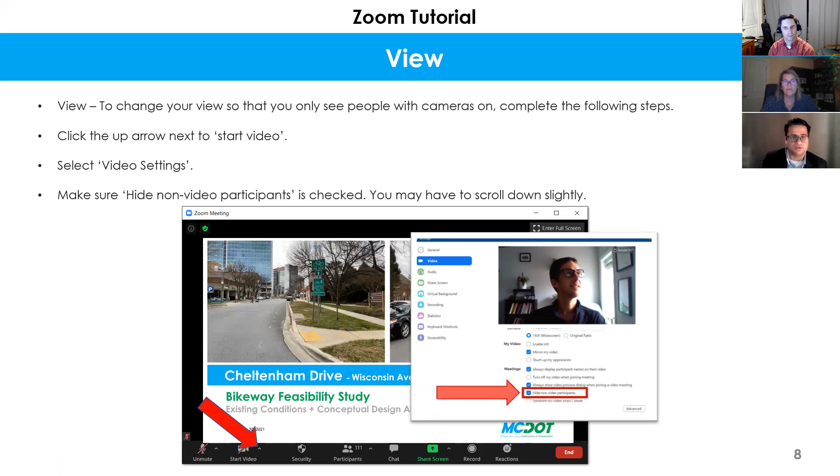At that time, we presented many of the projects that are part of this Bethesda Loop, which includes 2 that are under construction currently, along Bethesda Avenue and Woodmont. Soon to be under construction will be the Montgomery Lane Avenue segment. So Cheltenham is the northernmost portion of this Bethesda Loop, and it's an important east-west connection.

What are our project goals? First, we wanted to identify the route and bikeway types to complete the Bethesda Loop between Wisconsin Avenue and Pearl Street. We reviewed previous plans, including the Bethesda Downtown Plan adopted in 2017, the Montgomery County Bicycle Master Plan, and more recently in 2020, the Bethesda Streetscape Standards.

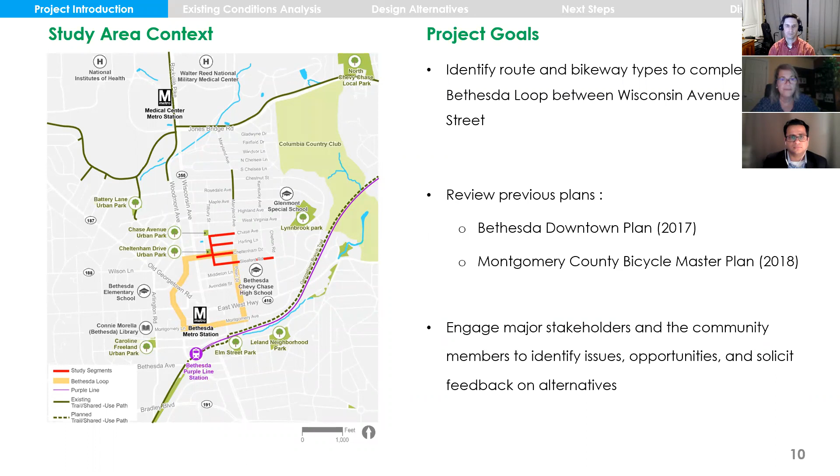As I mentioned, these are the previous plans approved back in 2017, 2018, and most recently the Bethesda Streetscape Standards adopted in 2020. The more recent plans recommend separated bike lanes on Cheltenham Drive between Wisconsin and Tilbury. That's the reason why we are performing this feasibility study.

It was something that we felt was part of a grant that we could submit, and we were awarded grant money from the state of Maryland. Again, it is a feasibility study.

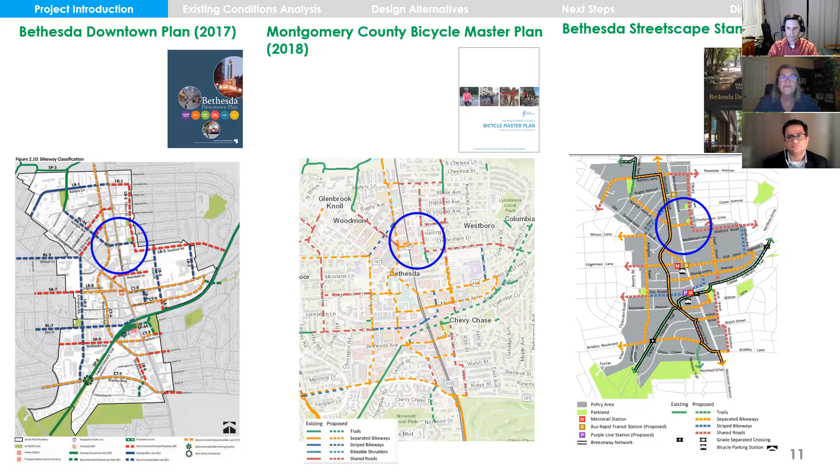So the outcome of tonight's public meeting and all of our analyses will be summarized in a report by the end of this year. The next slide again goes through the various segments.

Just quickly, Cheltenham Drive between Wisconsin and Pearl is 2-way between Wisconsin and Tilbury. Then you get to the circle, and it's 1-way westbound east of Tilbury.

There's certainly some challenges that we found with the 1-way westbound residential streets, parking and narrow cross sections, which Aditya will go into more detail.

The other streets, Tilbury to Sleaford to Chase Avenue, that's 1-way northbound between Sleaford and Cheltenham, and then 2-way north of Cheltenham Drive.

Chase Avenue is 1-way eastbound between Tilbury and Pearl, and Harling Lane between Tilbury and Pearl is 1-way eastbound. Finally, Sleaford from Tilbury to Pearl is currently two-way.

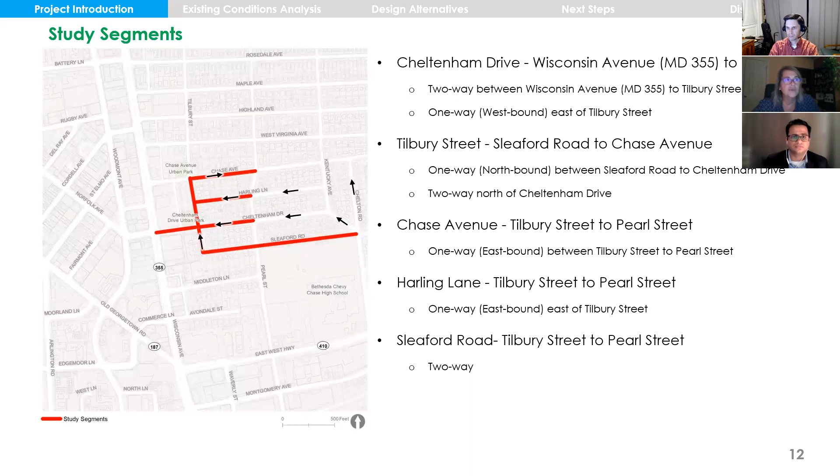So here's our planning process. We launched the project in November of 2020. We've been performing right-of-way topographic surveys in early 2021 as part of our existing conditions analyses.

We've been looking at network alternatives and bike facility type alternatives. Now we're here as part of our public and stakeholder feedback. Public participation is very important in developing these alternatives. After this, we'll synthesize all the comments.

We will also have a survey for those interested in a deeper dive into specific questions and issues. Once we compile all those comments, that'll be part of our preferred network alternatives and preferred bike facility type alternative. With those results, we'll start developing our concept design plans and produce a final report with a final presentation. Hopefully this will all be wrapped up.

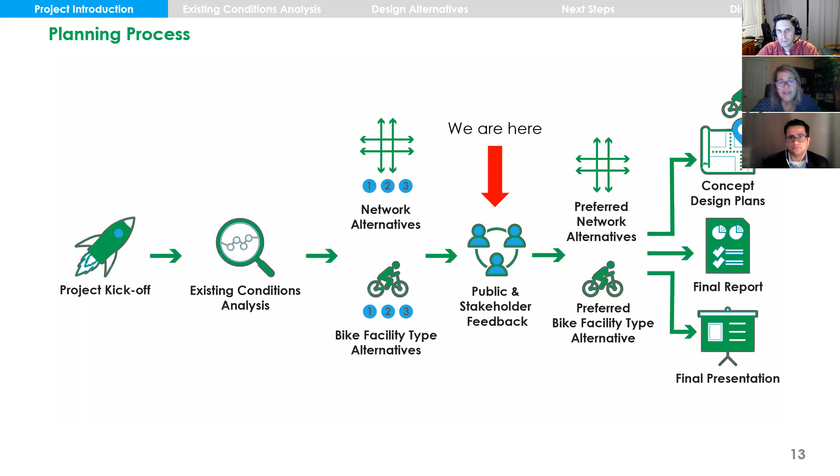On the next slide, we'll show the schedule that we hope to wrap everything up by December of this year. As you can see, we're here where we have a red arrow in September, so we have the next 3 months to wrap everything up.

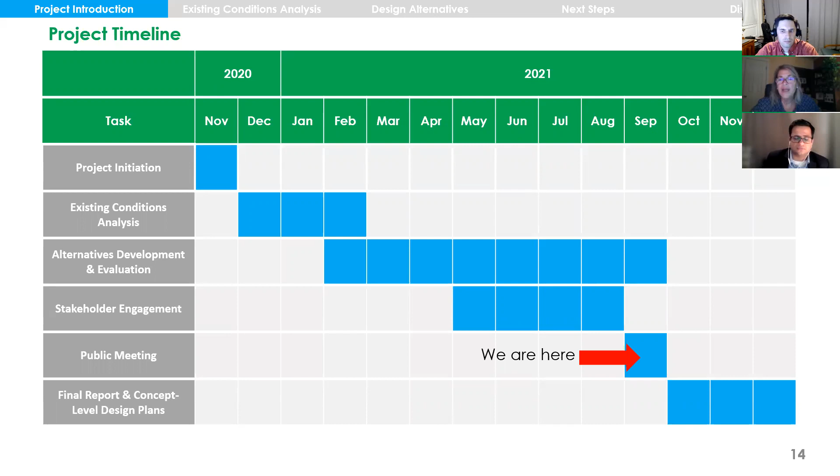And with that, I think the part you've all been waiting for is Aditya's presentation. So with that - yeah, thanks Pat. I'm going to start with a little bit of existing conditions analysis and then go into design alternatives.

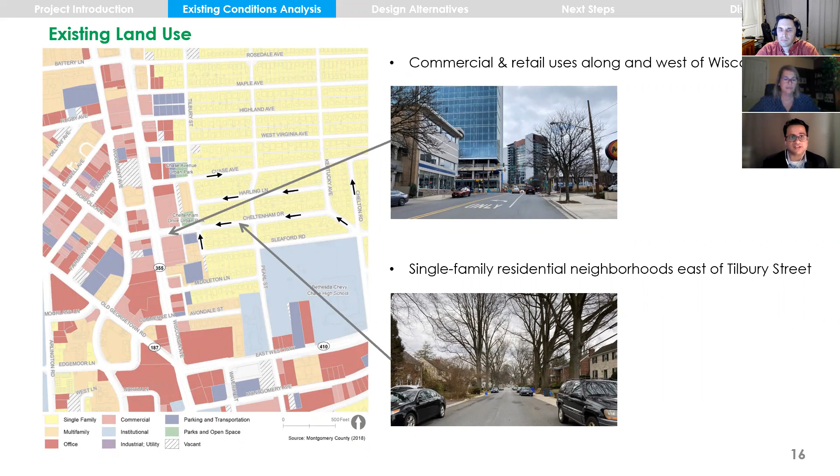So we started looking at this area. We looked at land use and quickly identified two context zones. We have the commercial area and the block between Wisconsin Avenue and Tilbury has some commercial land uses, a park, some residential with a parking garage. But beyond the circle at Tilbury Street, the context changes into single family detached residential neighborhood, and the streetscape and street widths also change pretty dramatically. So the land use and transportation context really changes at Tilbury Street, and we're aware of those two context zones.

In terms of existing pedestrian facilities, a lot of the streets have sidewalk on one side. Again, these are kind of narrow residential streets. On Cheltenham Drive between Tilbury and Wisconsin, we have sidewalks on both sides.

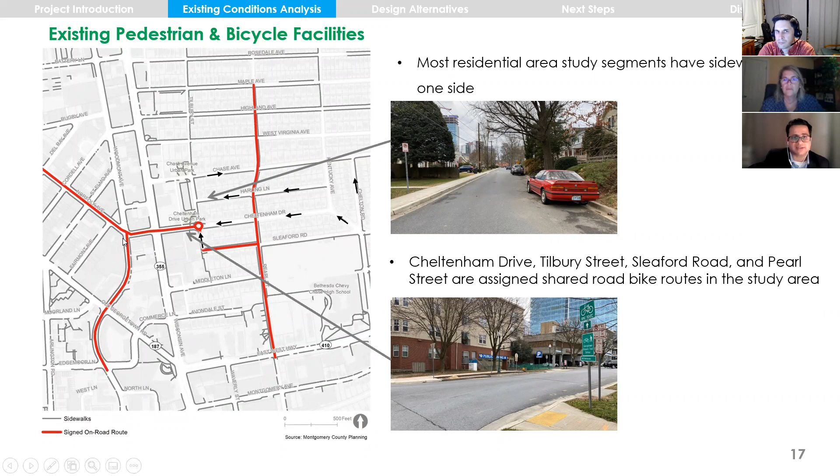In terms of bike facilities, there are certain assigned bike routes. Pearl Street currently has sharrow markings and bike route signs, same with Sleaford. On Tilbury, between Cheltenham and Sleaford, that's the current assigned bike route, and it has signs that indicate people on bikes should use the sidewalk, which is already a little narrow. We have more assigned bike route signs leading people to Woodmont Avenue, and there's a two-way cycle track that's going to be under construction soon on Woodmont Avenue.

As part of the bicycle master plan, the county has done a bicycle level of traffic stress analysis, which indicates which streets within the whole county are less comfortable or most comfortable for people on bikes. In simple terms, think about kids going to school, seniors, or adults who may not be comfortable riding close to vehicular traffic. They're interested in riding a bicycle but are concerned with the existing facilities. So it's trying to map that qualitative sense of which bike facilities are most comfortable and least stressful, or more stressful and less comfortable.

In terms of the study area, Wisconsin Avenue is shown as red, meaning it's LTS 4 — most stressful, least comfortable for people on bikes. The Cheltenham Drive block between Wisconsin and Tilbury is somewhat comfortable, somewhat stressful. So when we think about people who may not be used to biking regularly, they may not feel comfortable on the street, but people who bike regularly and are more confident riding with traffic may feel comfortable. It's kind of in that middle zone.

Once we go into the residential neighborhoods, these are narrow one-way residential streets with lower traffic speeds. A lot of these streets already have traffic calming treatments, so they're categorized as comfortable, least stressful streets. But one caveat: because these are a lot of one-way streets, one aspect of our project is to identify what that eastbound bike route beyond Tilbury is. Given the one-way nature, that's the critical piece, because even if these residential streets are narrow with low vehicular speeds and traffic calming, going against the vehicular traffic flow may be stressful for people on bikes.

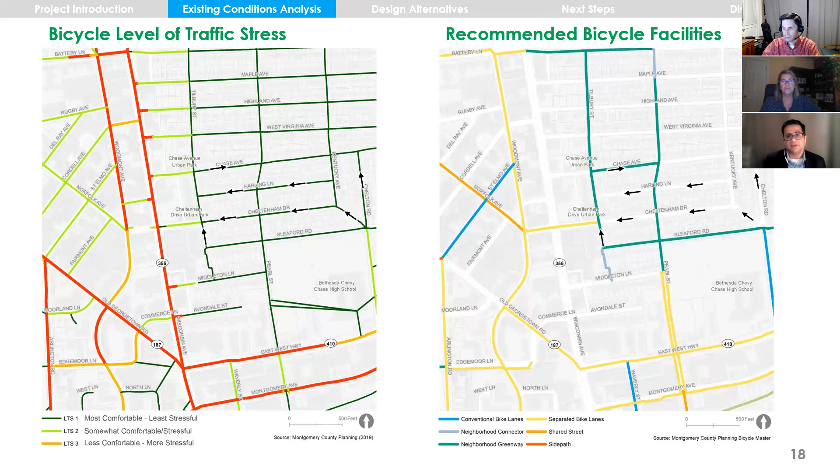In terms of the countywide bicycle master plan, there are recommended facilities in this area. As mentioned earlier, these yellow lines indicate separated bike lanes, meaning some sort of vertical separation, whether a buffer with flex posts, a curbed median, or a landscape median between the bike lane and vehicular traffic. Once we hit Tilbury, there are recommendations for a neighborhood greenway, which indicates a road shared between bikes and vehicles — not necessarily dedicated bike lanes, but streets that are narrow with low vehicular speeds and traffic calming where bikes can share with traffic. So Tilbury Street, Chase Avenue, Sleaford Road, and Pearl Street in the study area have been identified as that neighborhood greenway in the countywide master plan.

There are some additional off-peak on-street parking spaces in front of Cheltenham Drive Urban Park. On the residential streets, most of the residential area street segments have on-street parking on one side. Cheltenham Drive is actually the only street beyond Tilbury Street where parking is on both sides because it's a little wider than Chase, Harling, or Sleaford.

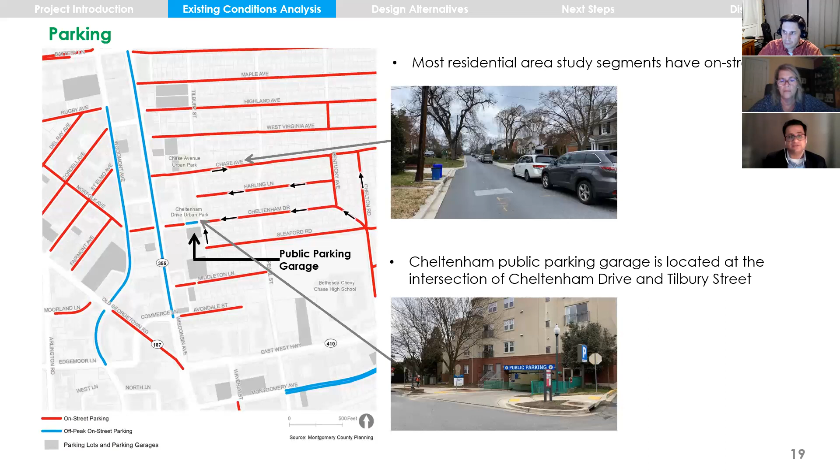Another important thing to note is Cheltenham Public Parking Garage is on the block, and it's publicly available parking, with I think 300 plus parking spaces in the study area as well.

So it is the data we have, but it may not be as complete as data you all may be more familiar with. But this is the data we have, and we wanted to present it. On the north side of Cheltenham Drive, near Midas, there are 2 spaces with a 1-hour restriction, and again in the evening it seems like it was fully occupied. These are averages over 2 days.

On the east side, on Wisconsin Avenue, there is no stopping in the AM and PM peak hour. Otherwise, there are 4 parking spaces in this area on the block, just north of Middleton Lane to Cheltenham Drive, and again in the evening it was fully occupied.

Then, as I mentioned, the Cheltenham Public Garage has 345 total spaces. There isn't any restriction, though some spaces may be short-term. But based on these numbers, it seems like there's a lot more capacity in that parking garage.

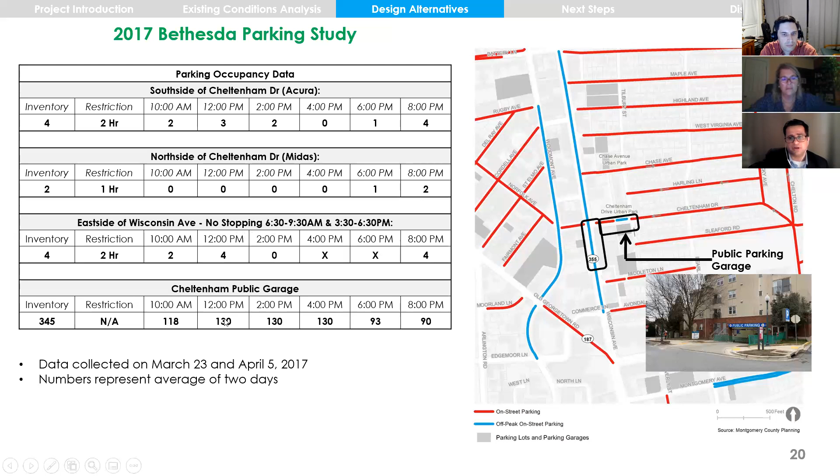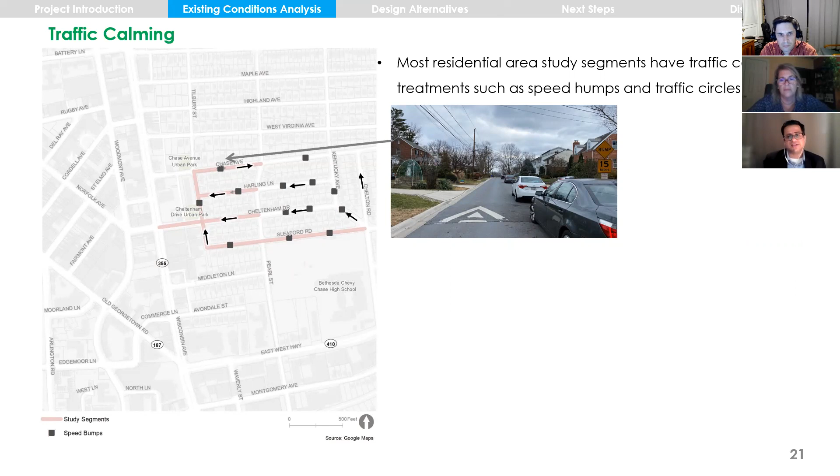On the residential streets, there are already existing traffic calming treatments, such as speed humps. The narrow nature of the street cross section with street trees and on-street parking also helps with traffic calming.

The next few slides I want to introduce these study segments in a bit more detail, and talk about some of the existing dimensions and the lane configurations.

The total width is 48 feet curb face to curb face, and the total approximate right-of-way is 80 feet. We have a nice 5-foot green panel with trees and grass, and then 10-foot wide sidewalks on both sides. Beyond the alley to Tilbury Street, the street actually narrows a bit.

The right-of-way is still 80 feet, but the curb to curb varies, from the narrowest point at the garage driveway of about 27 feet, up to 37 feet closer to the circle. It's bi-directional traffic, and there are some parking spaces for off-peak hours on the north side of the street.

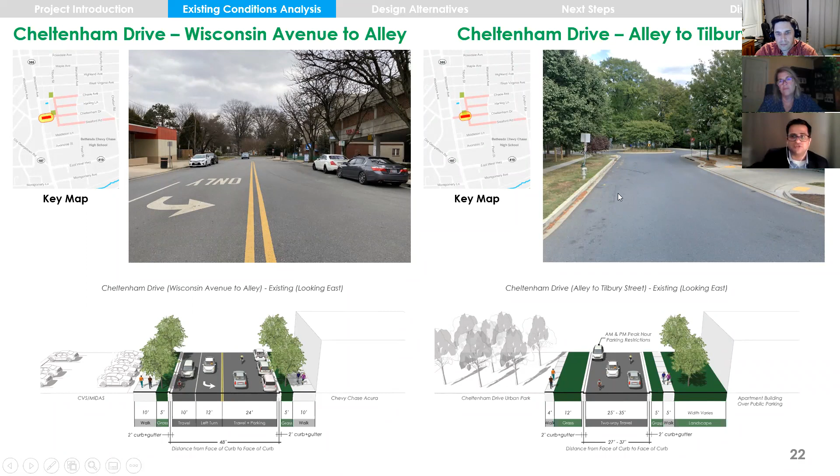As we go into the residential part, a lot of these cross sections look similar to each other. Cheltenham Drive is actually a bit wider, at 27 feet curb face to curb face. It is one-way westbound, but has on-street spaces on both sides. We recognize that a lot of houses on this block do not have driveways and rely on these on-street spaces.

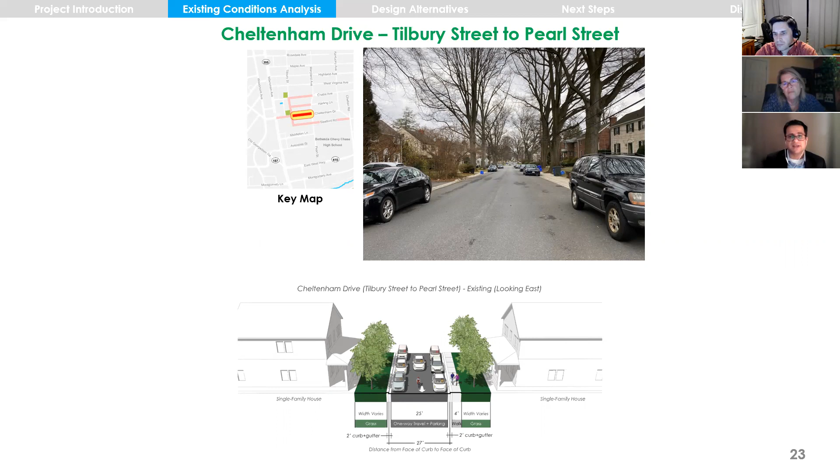Then Chase Avenue between Tilbury and Pearl. Again, these are narrow residential streets with parking on one side, and there's a 4-foot sidewalk behind the curb on one side. These are 19 feet curb face to curb face, pretty narrow, with 1 lane of travel and on-street parking.

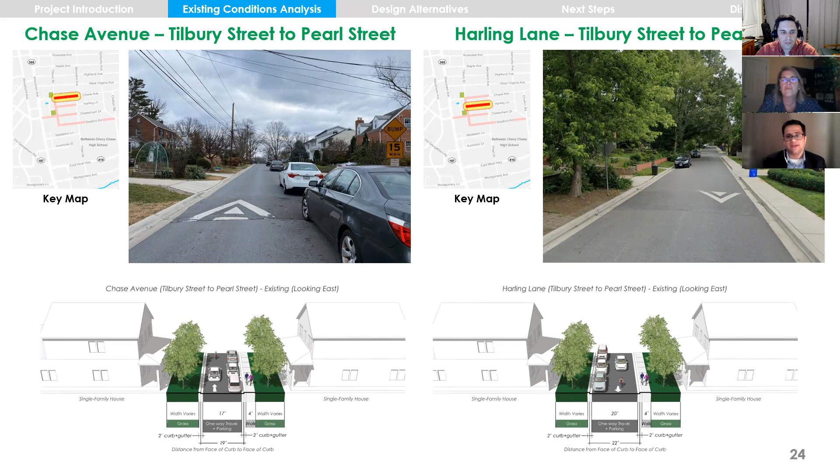Harling Lane has a similar story. Chase Avenue is actually the only street in the study area that's one-way eastbound. Harling Lane is one-way westbound, as is Cheltenham Drive. The dimensions are about 22 feet curb face to curb face for Harling Lane, with 1 lane of travel and on-street parking.

Sleaford Road from Tilbury to Pearl is again a narrow street, 22 feet wide. This is an interesting condition: this segment is 2-way, but Tilbury Street from Sleaford to Cheltenham Drive is 1-way, and you cannot enter from the circle. So only folks on this block are able to make a right or left turn and travel east on this street. Bicycle traffic is bi-directional here, and this is part of the assigned bike route currently.

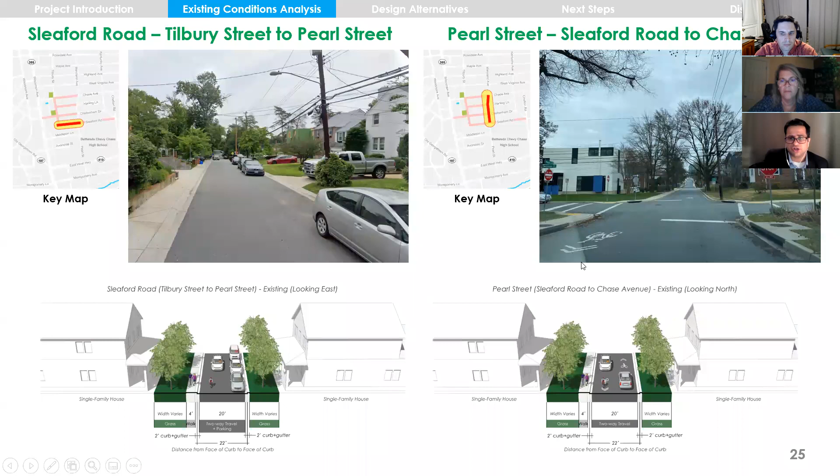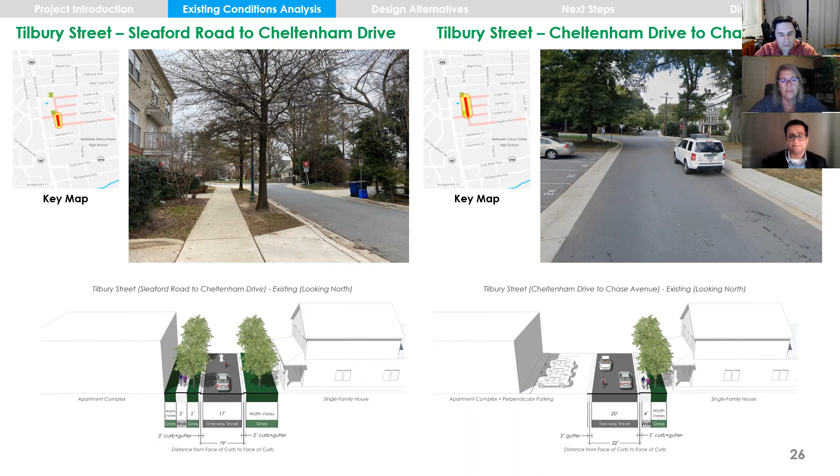Pearl Street is a wider street, 2-way, with share markings indicating bicyclists can share the lane, and it's part of the assigned bike route. Tilbury Street from Sleaford to Cheltenham is 1-way, 19 feet, but just 1 lane of travel, with parking restrictions so there's no on-street parking on this block. North of Cheltenham, it is 22 feet and 2-way, with no on-street parking on that block.

This diagram summarizes the issues and opportunities from existing conditions. We recognize two distinct land use context zones: the commercial block and the residential neighborhood. The traffic circle at Cheltenham Drive marks that change. Many study segments are 1-way narrow residential streets. Cheltenham Drive and Norfolk Avenue have similar cross sections, and the eventual goal is to continue the cross section for Cheltenham across Wisconsin along Norfolk to connect to Woodmont Avenue with 2-way separated bike lanes.

Can you go back for a second? I want to make clear that the dashed line extending down Woodmont from Norfolk will connect to the Capital Crescent Trail. That's right. There had been some confusion about the Bethesda Loop being a circle that didn't seem to connect down to the Capital Crescent Trail, but it does.

The construction activity has been on pause for the last month because of the streetery, but we anticipate beginning the rest of the Woodmont cycle track construction in November.

Thank you, Pat, for that. I think the Bethesda Loop was more like a loop of facilities in downtown Bethesda, but some of the facilities I can see here on Pearl Street, the assigned bike route, continue to Jones Bridge Road. So these facilities expand and connect to other facilities, but the loop was more about the downtown Bethesda facilities.

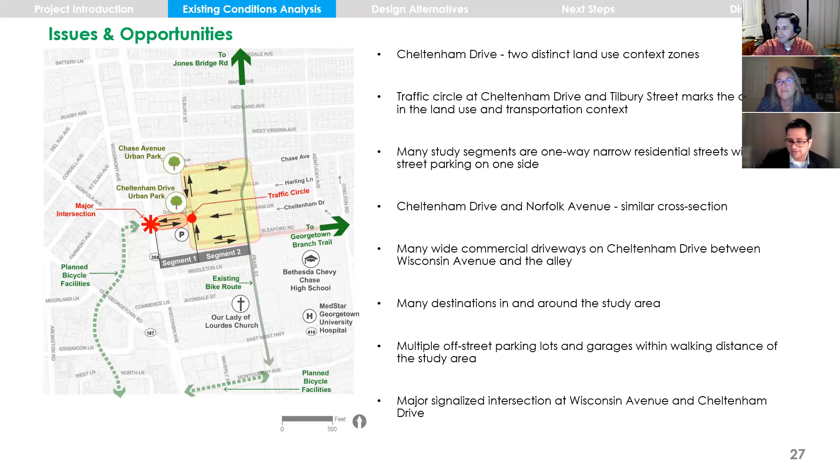For the next section, I'm going to transition into design alternatives. There are two aspects to our alternatives. One is the network route alternatives that connect Woodmont Avenue to Pearl Street—how do we find that alignment, especially for eastbound bicycle travel beyond Tilbury? The second aspect is the bikeway facility type alternatives, especially for Cheltenham Drive between Wisconsin Avenue and Tilbury Street.

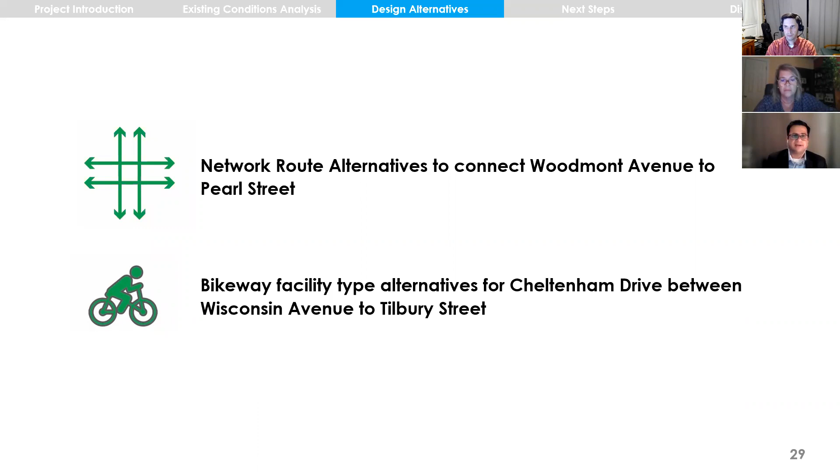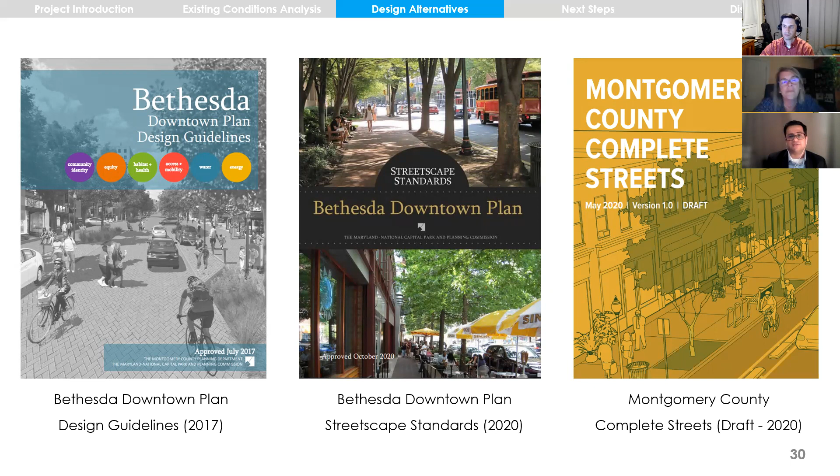When we started developing these alternatives, we referred to the latest and greatest standards: the Bethesda Downtown Plan developed in 2017, the Streetscape Standards from 2020, and the draft Complete Streets plan for the county. The dimensions in some of these alternatives are a direct result of the dimensions recommended in these plans.

In terms of the network alignment alternatives, we have three options. Option A, or alternative A, is Cheltenham Drive, then south on Tilbury Street, then Sleaford to connect to Pearl Street. Sleaford Road would eventually continue as a neighborhood bike route to Georgetown Branch Trail when that connection opens up, which is currently closed for the Purple Line construction. But this is the current assigned bike route. The challenge is that little one block of Tilbury Street is one-way vehicular traffic, so the question is how do we get people on bikes to travel southbound?

One alternative we've come up with is a contraflow bike lane, meaning there's a bike lane on one side of the street, and in the other direction people share it with vehicular traffic, which is one-way northbound. Alternative B is a straight shot on Cheltenham Drive. This option has heavy parking impacts on that block because Cheltenham Drive is one-way westbound, so the challenge is: if this is the assigned bike route, how are people going to go east?

But we do recognize that parking is critical for that block, but we wanted to test all these alternatives for their pros and cons.

And then alternative C is kind of a loop. You connect Cheltenham Drive, then use Tilbury Street, and follow the vehicular directions. Chase Avenue is one way eastbound, so that will be the assigned route. And then Sleaford is the natural westbound traffic, and Pearl Street remains this north-south bike route.

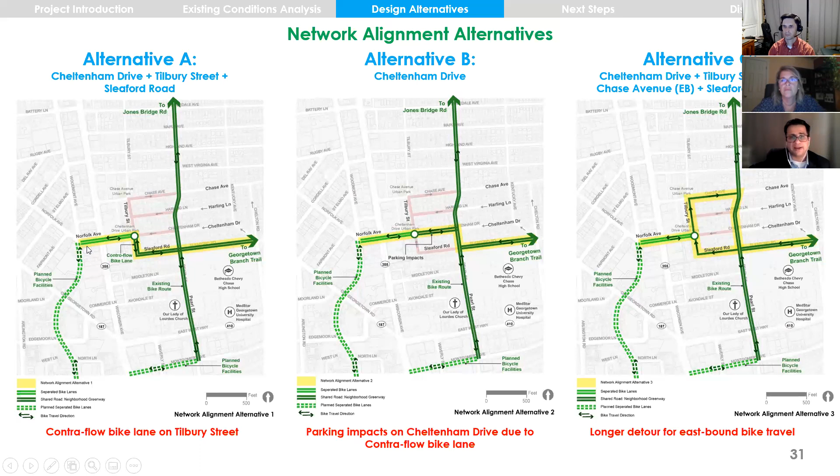For the alternatives, if you notice on all the network alignment alternatives, the Cheltenham Drive segment between Wisconsin and Tilbury is common for all these networks. That's simply because this is one of the locations where we are able to cross Wisconsin Avenue at a signal and then connect to Woodmont Avenue separated bike lanes. So this Norfolk Cheltenham connection is common on all these network alignments.

So we wanted to look at Cheltenham Drive's bikeway facility options. We have 5 options for this one block segment. Option 1 is conventional bike lanes.

Now, again, this is not recommended in the countywide bicycle master plan. So we would be deviating from what's already adopted, and we would need very strong reasoning to deviate from an adopted countywide bicycle master plan. But again, we wanted to test it and see how it matches with some of the other alternatives in terms of evaluation measures.

So this option basically restripes the existing roadway with 5-foot bike lanes on either side. The bike lane going eastbound would be sandwiched between a 10-foot vehicular travel lane and 8-foot parking, so this would be kind of tight. And again, we would be deviating from the countywide master plan. But this does keep all the existing on-street spaces, so there are no parking impacts in this option.

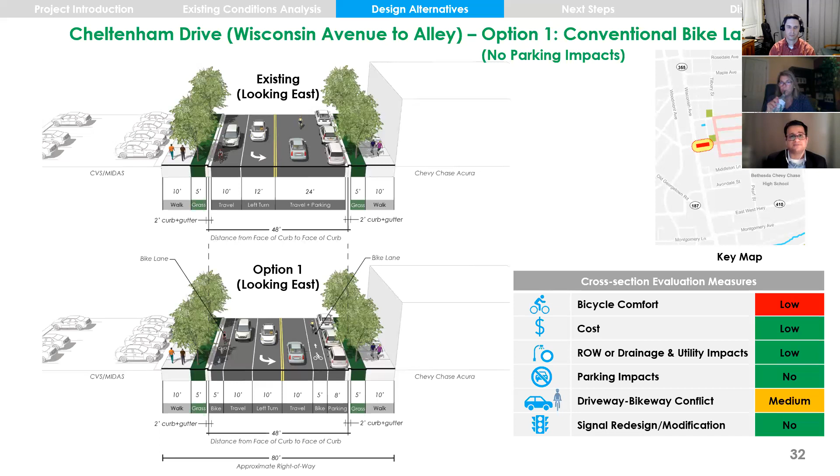So this is what it looks like today, looking east. And this is a rendering depiction of that option. Basically, we would have a striped bike lane with some green conflict paint at driveways and intersections. But this is basically a 5-foot bike lane, and you're sandwiched as a person on a bike between a car and on-street parking.

With these facilities, the dooring issue is a concern where people getting in and out of parked cars. Dooring has been a big issue with bicycle crashes. The other thing is, given the driveway widths and the number of driveways on this block, some of the on-street spaces come really close to the driveways, and there's concern with sight distance. If you look at this image and imagine riding a bike in this bike lane, sometimes it'll be hard to see a car coming out of the driveway, or for a person in the car coming out of the driveway to see you as a person on a bike.

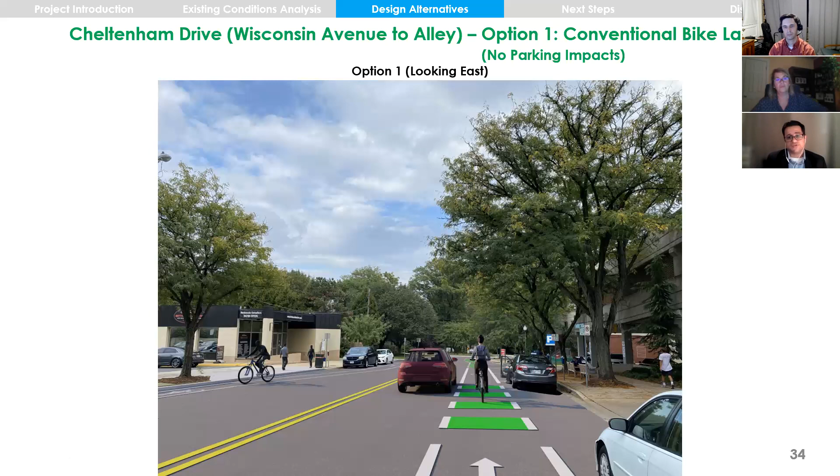So again, those are some of the safety issues with this option. But again, this option keeps on-street spaces and is low cost to implement.

Option 2 is one-way separated bike lanes. This would technically be following the countywide master plan. It is a separated bike lane. This would be impacting those 4 on-street spaces on the south side. This would keep the 3 lanes, 1 lane in each direction plus a left turn lane, and use the parking space width to create that buffer between a bike lane and the car travel lane.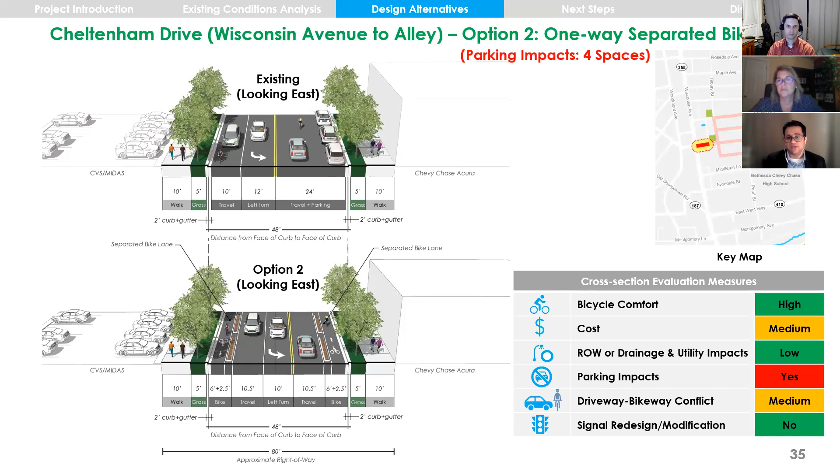With this, the bicycle comfort is high because we are separated from vehicular traffic. The cost is medium because there will be some construction costs associated with building those medians, but we're not moving curbs or drainage, so that is low. There are 4 parking spaces impacted. The driveway and bikeway conflict is medium because you're on the side of the vehicular traffic for a person coming in and out of the driveway. And there are no signal redesign modifications expected with this option.

And again, a rendering depiction of this option. This is the existing. With this, you'll have a median that could be a brick stamped concrete median or a precast median, and then that conflict marking at driveways. This provides better sight distance and view angles for people on bikes to look at the driveways, and vice versa for people in the driveways coming in and out.

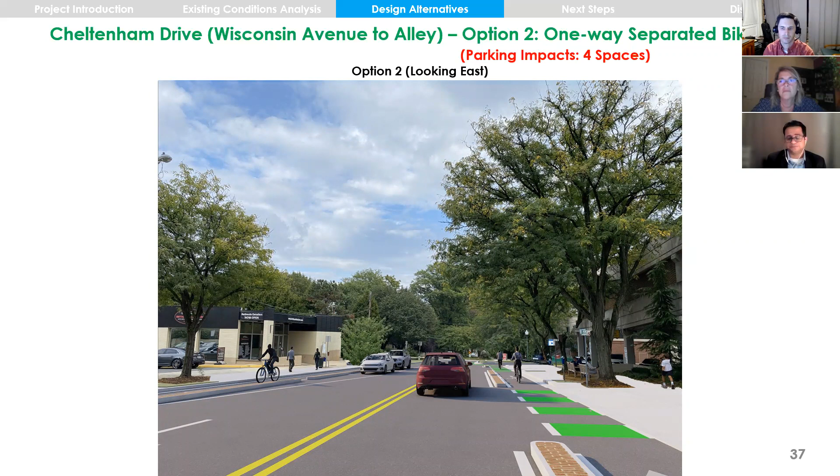Option 3 is 2-way separated bike lanes on the north side. This is an option where we are testing if we can fit everything we want on this narrow 48 feet curb face to curb face. We keep parking in this option, we keep the 3 lanes, and we have a 2-way separated bike lane. But the drawback is that all the widths are minimum or lower than minimum recommended in the standard. So an 8-foot 2-way separated bike lane with a 2-foot buffer that includes the gutter pan is substandard for a 2-way separated bike lane. So that is a concern here.

Same thing here with 17.5 feet. You're going to have a 10-foot or 10.5-foot travel lane and 7-foot on-street parking, including the gutter pan. So these are minimum or lower than minimum dimensions, and it's going to be tight.

So the bicycle comfort is medium because it's tight. The cost, with the separators between the bike lane and the travel lane, is medium. But we're not trying to move the curbs, and we're not expecting to change the drainage or utilities. The parking impacts are none here because we're trying to maintain that. And we're saying there is high driveway and bikeway conflict because it's a two-way separated lane on the north side. People coming in and out of that CVS driveway or that alley generally don't expect two-way bicycle traffic, and they don't look to the right coming out of the driveway to see a bicyclist coming from the other direction. So that's a safety concern.

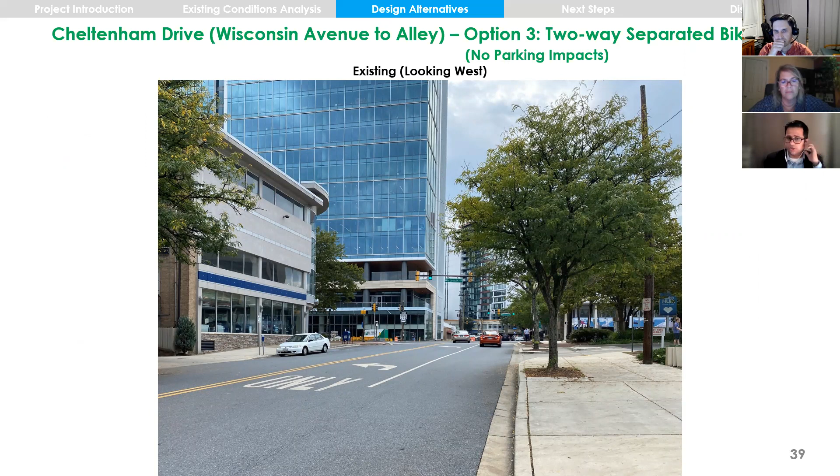With this, we might have to redesign the signal. So again, it's a yes. This is kind of a rendering depiction. We are on the other side of the street now, looking towards Wisconsin Avenue. This is kind of what it would look like. It's kind of tight, but we'll be able to get that separation. We'll have to use that gutter pan width. So it's not ideal, but we're trying to test if we can fit everything in here.

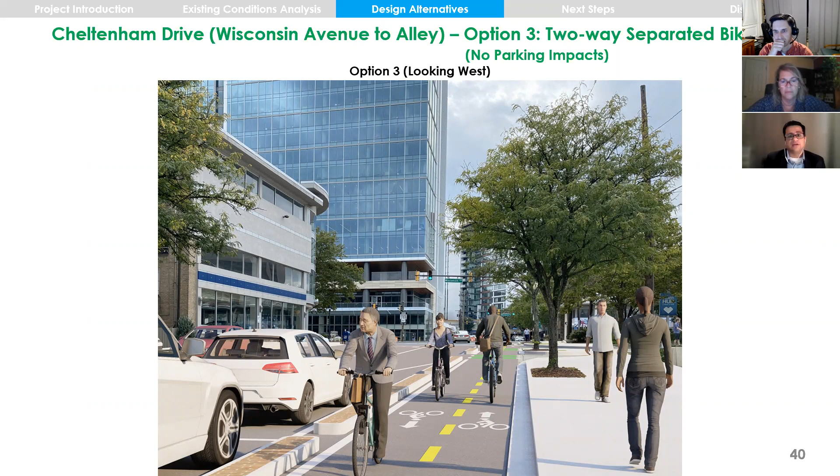Option 4 is a similar option, two-way separated bike lanes on the north side, but this tests if we take parking away and use that space to do a nicer landscape median, or a wider median between the two-way separated bike lanes and the travel lane. The dimensions here are much better in terms of the standards. So we have a 12-foot two-way separated bike lane with a 5-foot buffer, then 10.5-foot outside travel lanes, and a 10-foot left turn lane.

So there's high bicycle comfort. The cost is medium again. Right-of-way and drainage utilities are low because we're maintaining the original curbs and the drainage. The parking impacts are there with those 4 spaces. Again, because it's a two-way bike facility, we're saying high driveway and bikeway conflict. And we might have to redesign the signal.

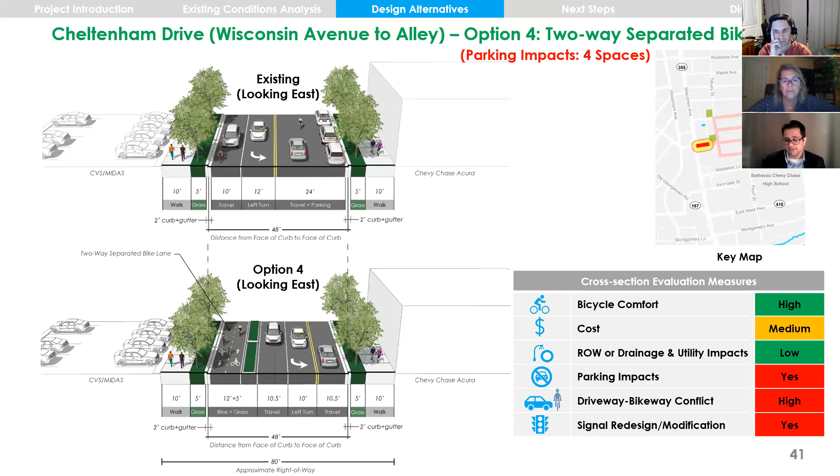Again, this is a rendering of what it would look like - much wider two-way separated bike lanes. With the wider widths for the medians, we might be able to do some landscaping. But there are some underground utilities, so if this is the option we proceed with, when we start testing and developing initial designs, we might have to remove the landscaping and have stamped brick or a different kind of treatment. But it'll have a wider separation between vehicular and bicycle traffic.

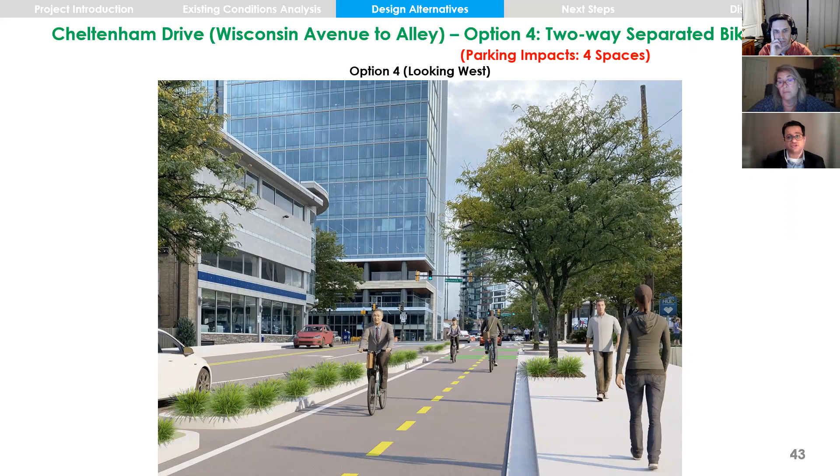Option 5, the last option for this block, is basically a long-term option - a two-way raised separated bike lane. The curbs would move, and we'd design a two-way separated bike lane at sidewalk level, with a tree panel separating the curb and the bike lane. Very high bicycle comfort quality, but very high cost since we're reconstructing the street at this point. We'll most likely have to move drainage and utilities to build this. But with just one separation between the curb and the ped and bike facilities, we'll be able to keep the parking. In all the earlier options, because we were maintaining existing curbs and adding an extra buffer between the bike lane and travel lane, we no longer have to do that here since the ped-bike zone is one zone with one separation via the tree panel.

The driveway-bikeway conflict we're calling low, because with this option we might be able to consolidate some driveways or redesign them with better signage or turning radii, maybe raised driveways that help with safety concerns seen in other options. But we'll have to redesign the signal. So this is a high-cost, long-term option we're not sure is feasible in the short to medium term.

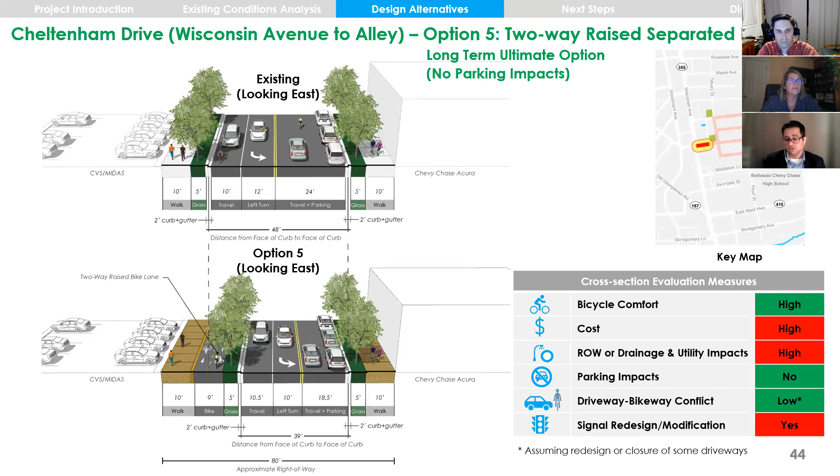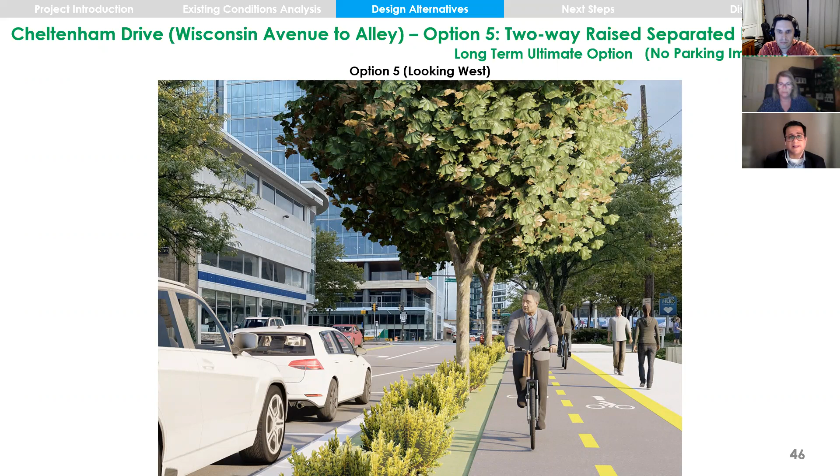This slide summarizes all these options. Option 1 is just striped conventional bike lanes - low bicycle comfort, but low cost, low drainage impacts, and keeps parking. Options 2 to 5 are all separated bike lanes, so they technically comply with the countywide bicycle master plan. Option 2 is one-way separated bike lanes with parking impacts. Option 3 is two-way separated, trying to fit everything in, but it's substandard in dimensions, which is a concern. Option 4 is also two-way separated, wider, but impacts 4 parking spaces. Option 5 is the long-term option with high costs.

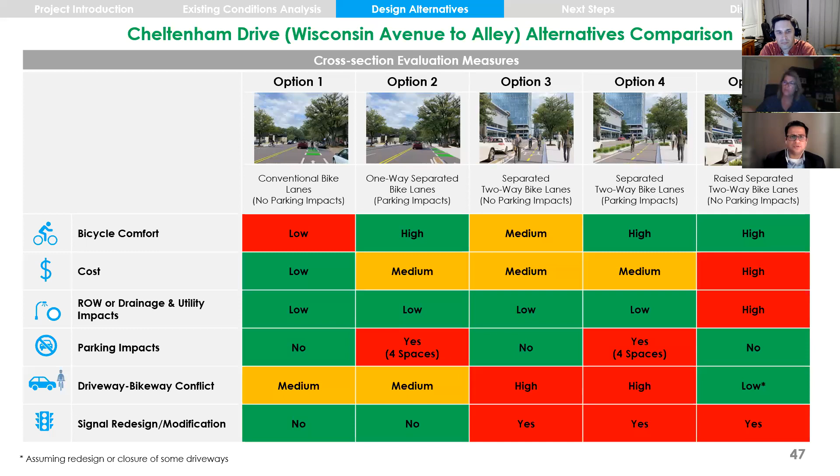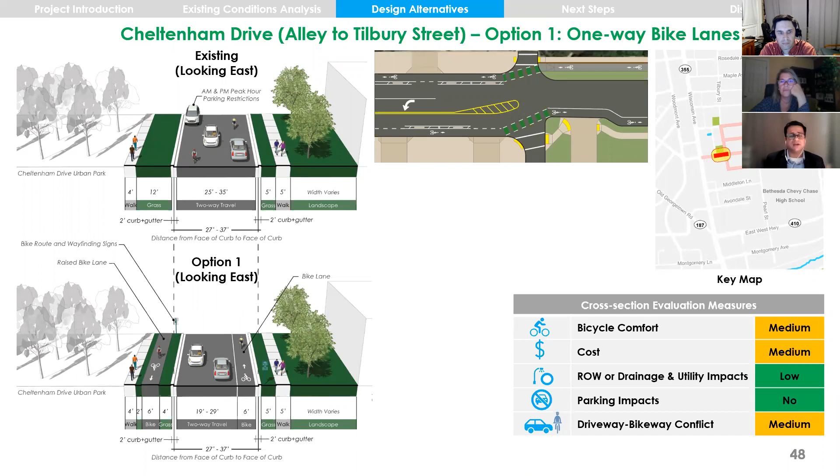Whatever option we end up with for the block between the alley and Wisconsin Avenue, if it's the one-way option - whether option 1 or option 2 - we'll transition that beyond the alley to Tilbury to keep bike lanes on either side of the street. In this location, we might use the landscape buffer in front of the park to at least keep bike lanes in one direction. Option 2 for this, if we go with the two-way options, means continuing the two-way separated bike lanes on the north side of the street, eating more into that landscape buffer in front of the park and replanting some trees there.

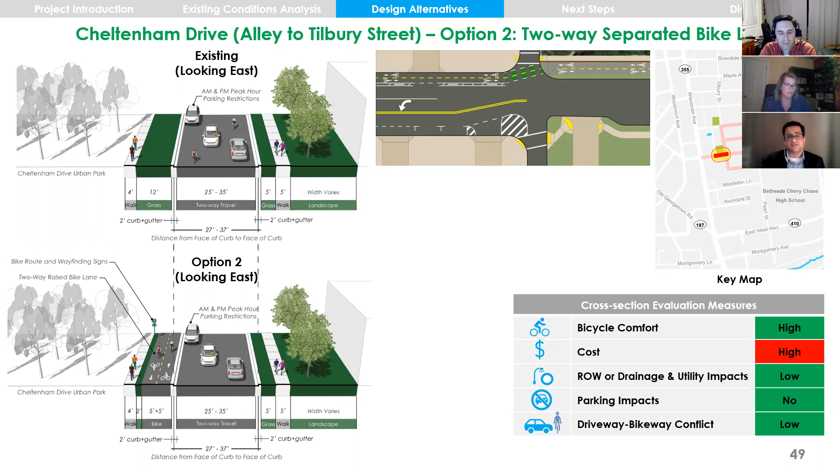Next I'm going to transition back to the network alignment. We've been talking about this one block between Wisconsin Avenue and Tilbury, which is really the most complicated block in terms of the permutations, combinations, pros and cons of all these options. But the other question we're trying to answer is what the assigned bike route is beyond Tilbury Street. If you remember those 3 network alternatives, alternative A is Tilbury and Sleaford.

Here we have slightly different evaluation measures for these network alignments - bicycle route directness, so how directly can you go from, say, Tilbury to Pearl Street. In this case we're saying medium compared to some other options I'll share. The number of intersections to navigate are 2 - basically the circle at Tilbury, and then Sleaford and Tilbury.

And then there is a little bit of contraflow travel involved here because Tilbury Street is one way for vehicular traffic northbound. So if this is the assigned bike route for two-way bicycle traffic, you'll have to travel against the vehicular traffic for this one block.

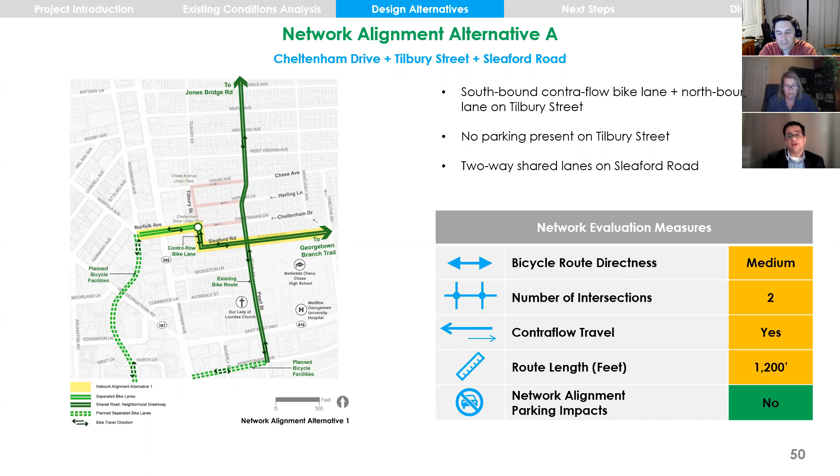And then basically we're counting the route length, which kind of matches the route directness in some ways. And then what are the parking impacts on the alignment? So in this one, we are not impacting any parking.

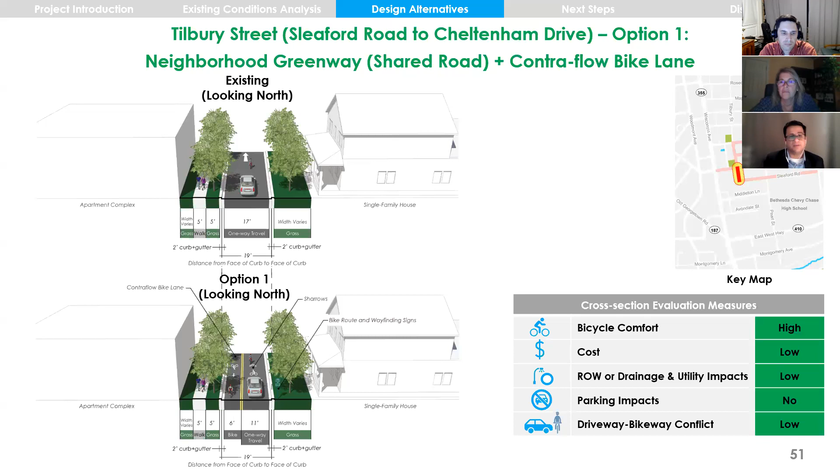And in terms of that contraflow bike lane on Tilbury, this is what it would look like. If you remember the existing cross section, we have about 17 feet from just the asphalt, so the gutter pan to gutter pan, or 19 feet from curb face to curb face. We can repurpose that space for one 11-foot northbound travel lane, and then one 6-foot southbound contraflow bike lane. So the southbound bicyclists would be able to use their own bike lane and not have to share the 5-foot sidewalk that's there today. And for the northbound, because it's a residential street, it's kind of a neighborhood greenway treatment where people on bikes would share it with vehicular traffic.

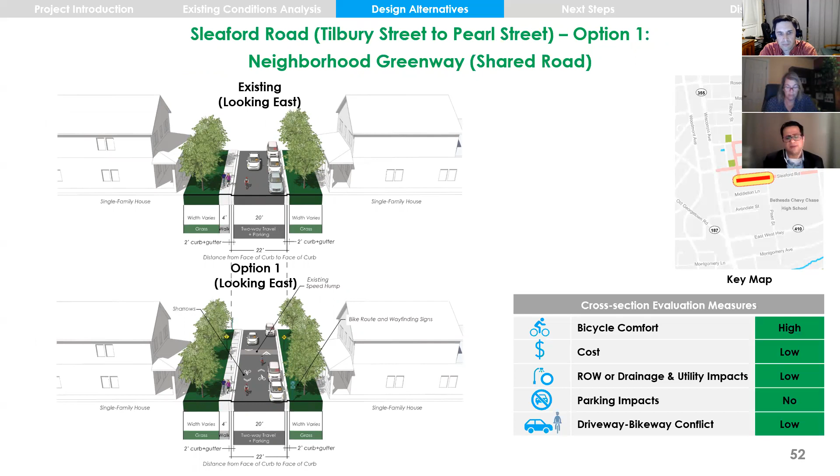And then once we hit Sleaford, we're not changing anything from existing. We're going to keep parking on the south side. There are already existing speed humps. We may add some sharrows and bike route signs or wayfinding signs to indicate that this is the assigned bike route. I think there might be signs already out there for this segment since it's an existing bike route.

Alternative B is a straight shot from Cheltenham Drive. So this is where, again, we'll have very heavy parking impacts on that residential block. That's a major concern when we test this alternative. But we wanted to test this because this is that straight shot to Pearl. We just have the traffic circle at Tilbury to navigate.

There is contraflow travel involved because this whole longer block is one-way westbound. So for an eastbound bicyclist, they'll have to travel against the vehicular travel. It's the shortest route length.

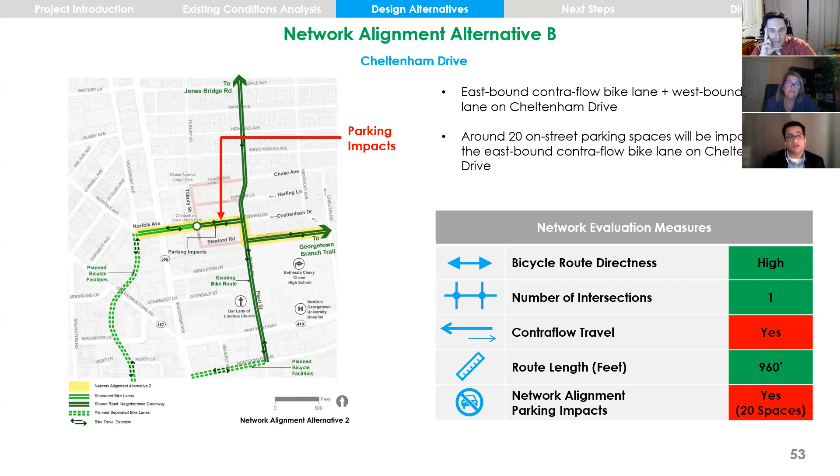And then there are 20 spaces that will be impacted with this option. So this might be the fatal impact of this option, those 20 spaces where houses don't have driveways and depend on parking. This might be a difficult option to proceed with.

But then in terms of the cross section, the contraflow bike lane will basically be on the south side going eastbound, and that's what will have impact on the parking. But again, this is one of the 3 options we're testing.

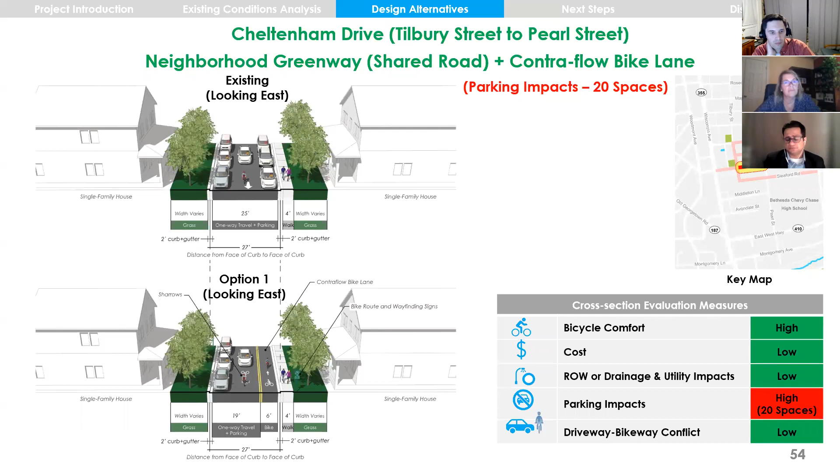And then option C, which is kind of the countywide bike master plan option, where we have Chase Avenue and Sleaford as these neighborhood greenways, and then Tilbury Street that goes northbound. So the route directness for this option is low because if you're going east, a person on a bike technically would have to go up Tilbury and then Chase Avenue and then go south on Pearl Street.

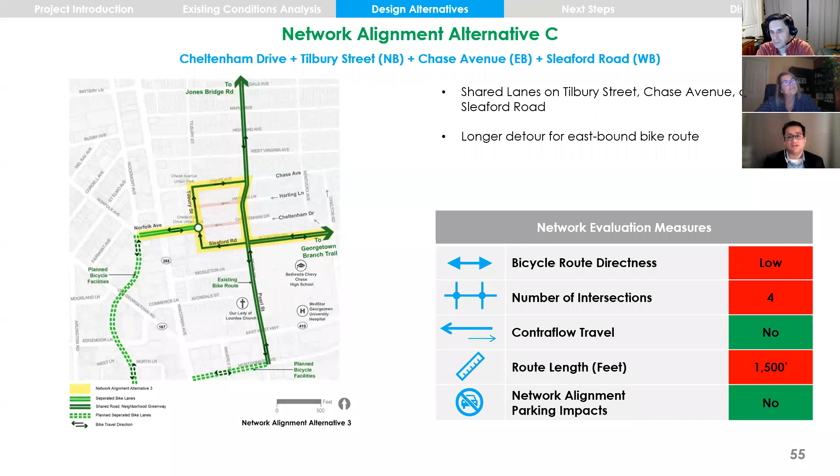And there might be concern with people really following that. People on bikes may still dart across vehicular traffic on Cheltenham or Sleaford or Tilbury. And then there's no contraflow travel involved in this option, but it's a longer route length and it won't have any parking impacts.

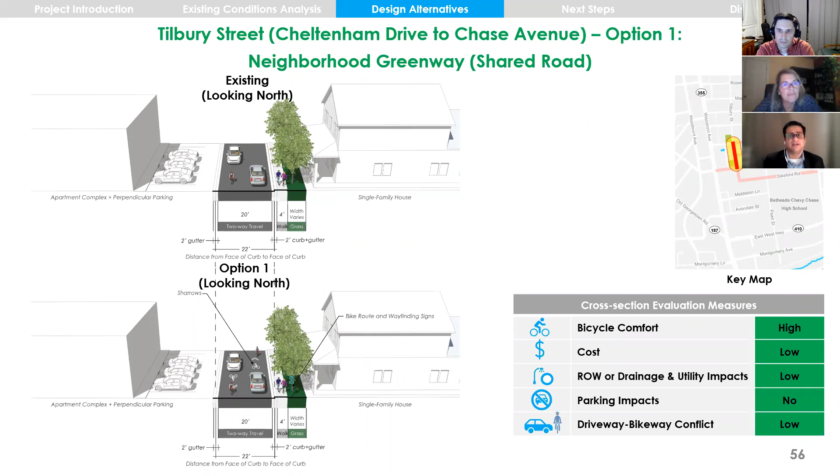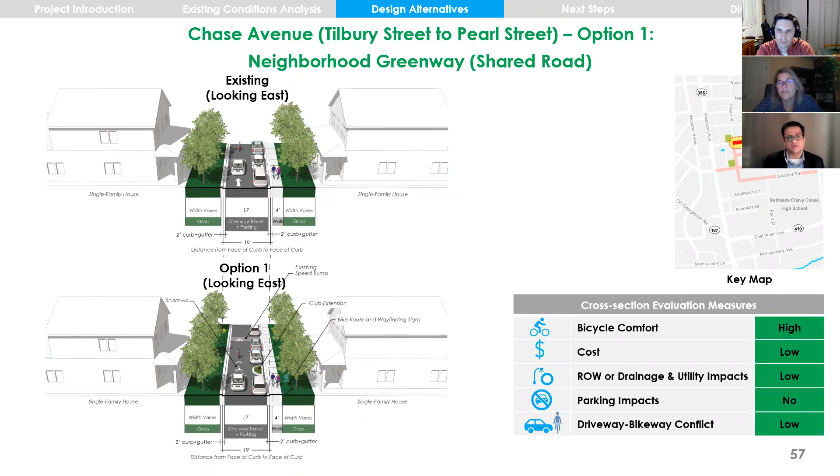So again, in terms of cross-section, it doesn't change much. We might have to add some sharrow markings and bike route signs if this is the assigned bike route. Same thing with Chase, maybe if we want we can add some additional traffic calming, but this is already a narrow traffic-calmed street. So some additional wayfinding signs may suffice for this option.

So I think those are all the alternatives. I know that's a lot of information to digest. So at the end of this presentation, we'll have a Q&A session, but we're also going to open up a survey.